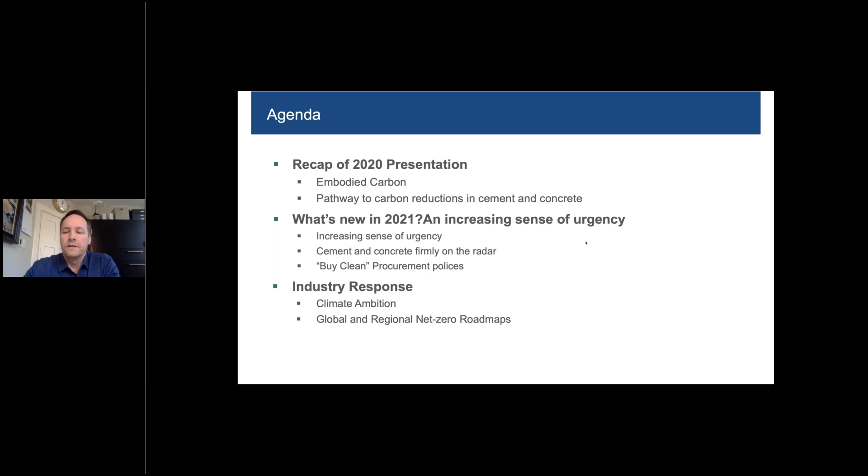So very briefly, just recapping some of the slides some of you may have seen before. A big driver for the attention on concrete—climate change has for many years been focused on industrial emissions. So the cement industry, as a large industrial emitter, has been deeply involved in conversations around carbon pricing and other policies. But that focus on emissions is now shifting in a way that is really bringing concrete into the conversation, and a lot of that is driven by this notion of embodied carbon that comes from the green building sector, which refers to all the carbon emitted from the extraction and manufacture of products. So in the case of concrete, cement is where most of the emissions come from, but ultimately concrete is the product that gets used in buildings and infrastructure.

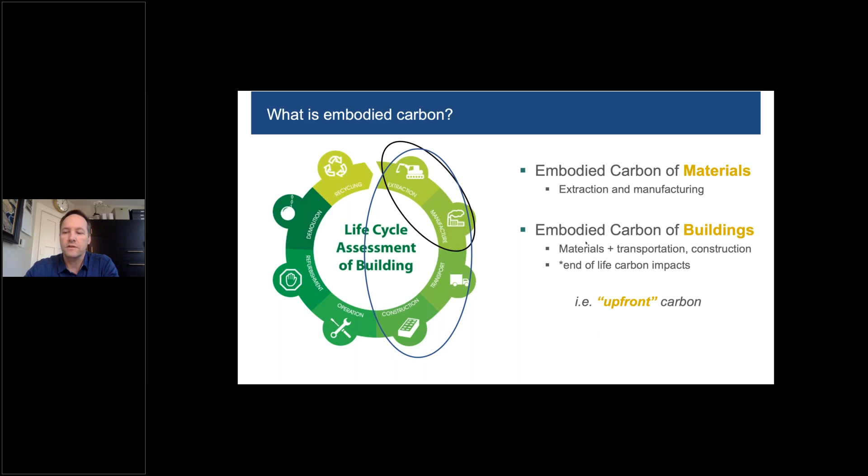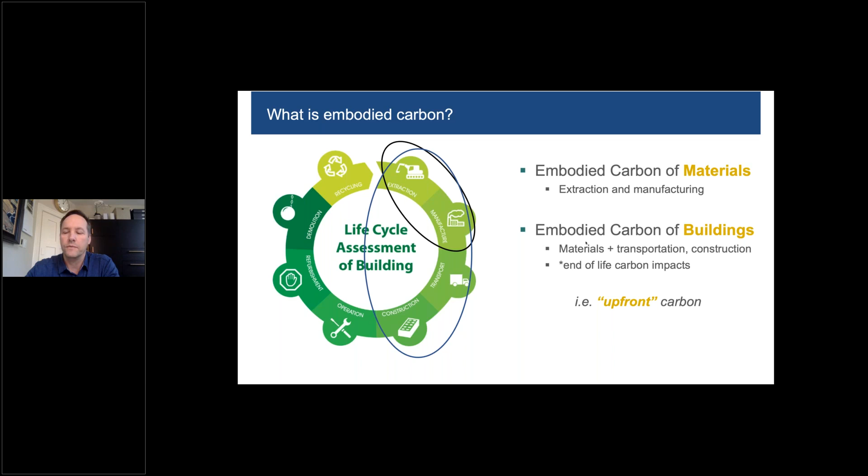And as the construction industry, architects, developers, and others start to look at reducing carbon from their projects, they're no longer just looking at, say, the energy emissions from their building. They're starting to think about the materials they're using to build those structures as well. And one of the reasons is that when you look at buildings in particular, they're about 40% of global emissions, but of those emissions, about 25% of that 40% come from the materials used in the construction process. So it's a significant chunk of the pie.

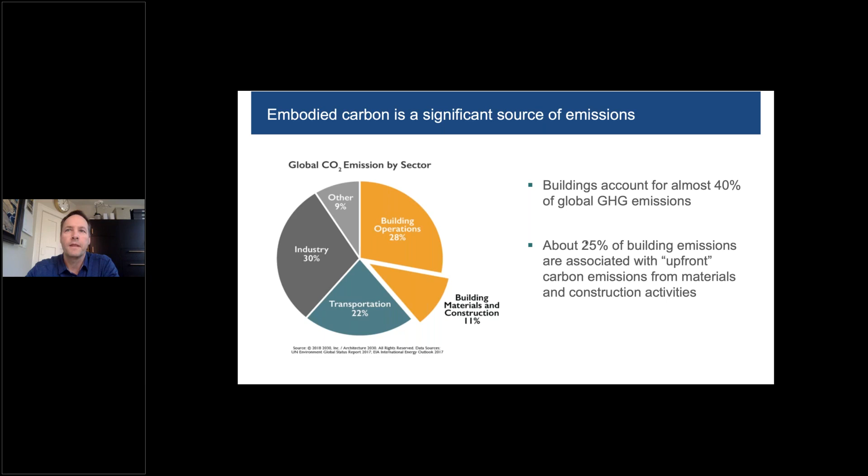And the other reason is—anticipating a bit of the conversation around urgency—there's this notion that in buildings and infrastructure, when you emit carbon to build the materials for a project, those emissions come immediately, whereas some of the operational emissions from heating and cooling your building, for example, accumulate over time. So you get more early bang for your buck by dealing with those embodied, or so-called upfront, emissions.

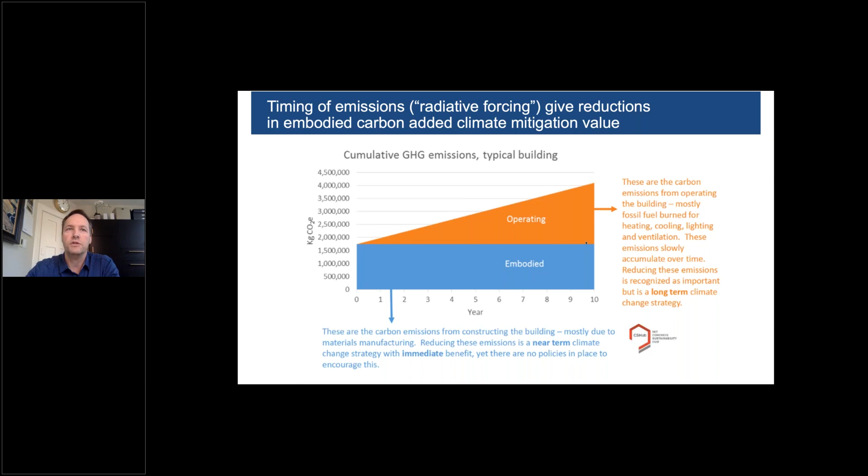Cement and concrete are obviously huge players in terms of construction materials. In fact, the most used construction material on the planet is concrete. I'm sure you're all familiar with the stat that nothing is used in greater volume on the planet than concrete, except for water. So it's not surprising that we would be on the radar screen.

But just from the industrial perspective, you can see here that when we look at industrial emissions only, cement is a significant part of that pie. About almost a third of all industrial emissions come from cement manufacturing. That translates into pretty significant numbers - up to 8% of global emissions, total human-caused emissions, come from cement manufacturing.

In Canada, it's a bit less than that. It's about 1.5%, but it's still close to 11 megatons, and so it's significant. I think people realize that you can't possibly address the climate challenge without addressing emissions from cement manufacturing.

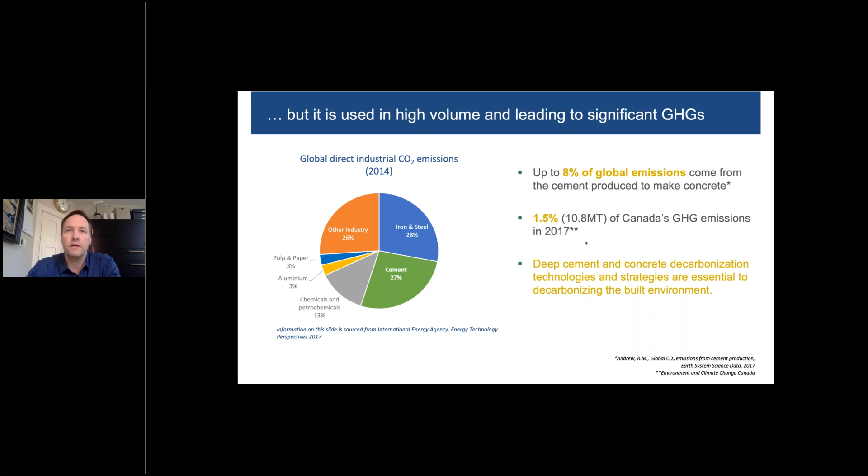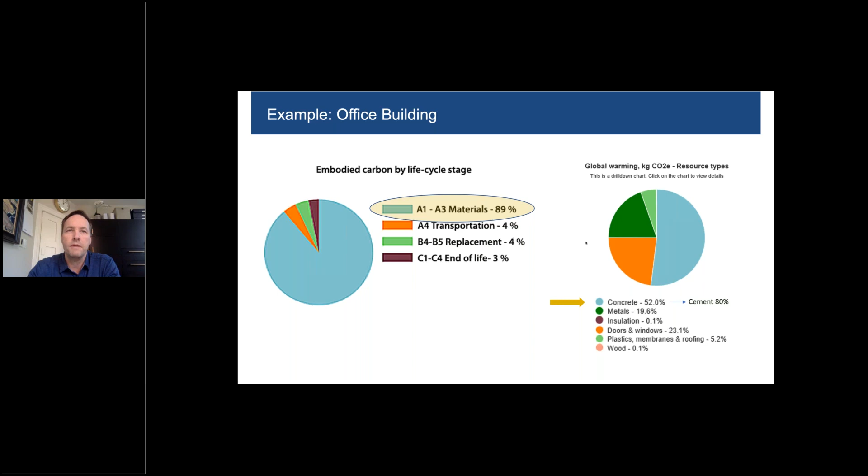But on the concrete side, you can see when we look at actual projects, materials are what drive the emissions - in this case an example of a multi-story office building - and of the materials, it's concrete, and in particular the cement in that concrete, that is the major player. So that basically explains why concrete is suddenly becoming a big focus of those concerned with climate change.

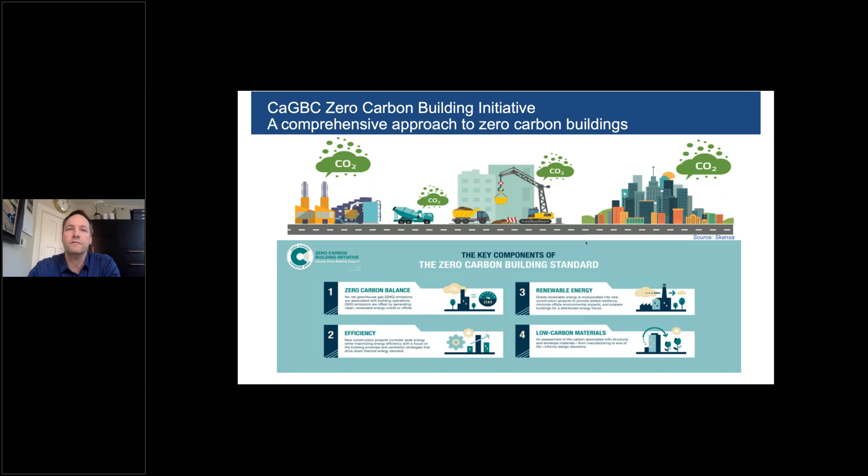Here's just an example, a Canadian example, of the Canada Green Building Council further developing the LEED programming and creating a separate carbon-focused standard called the Zero Carbon Building Initiative, and embodied carbon is very much part of that standard. So it's becoming a very normal thing, certainly in the green building community.

Up until now, we've been talking about the different things we're doing as a sector to decarbonize that final concrete product. A lot of it focused on the cement side, so improving the efficiency of the manufacture of cement, blending lower carbon cements like Portland limestone cement, using lower carbon fuels in our industrial processes. But increasingly, we've had to talk about the concrete side too.

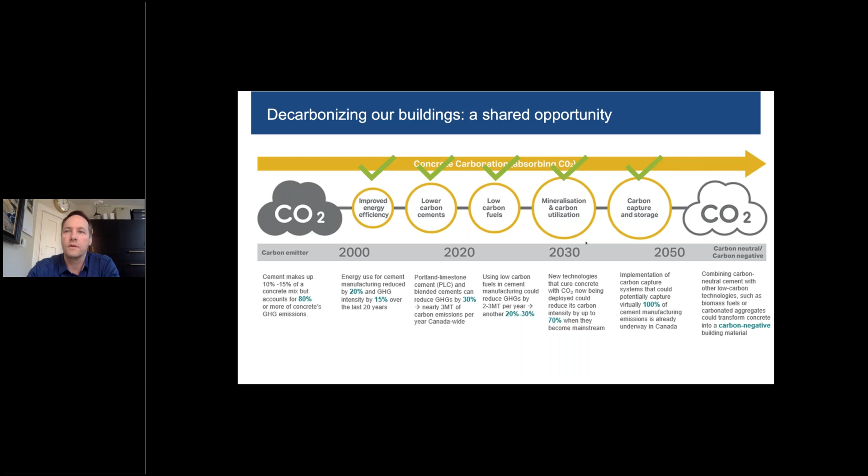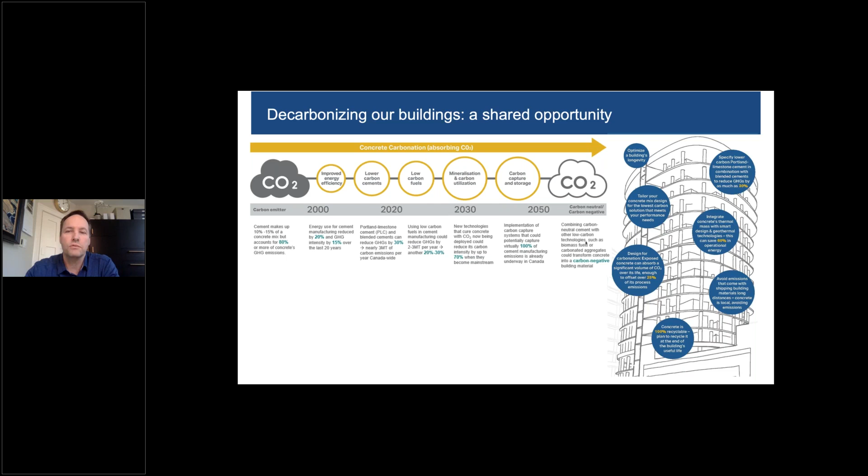So, looking at mineralization technologies that are starting to come out, about injecting CO2 or putting carbonated materials into the concrete itself. And then also talking to the design community about what role they have in making sure that they're optimizing their concrete, that they're aware of and using the low carbon solutions, that they're taking advantage of some of the design-based strategies to reduce carbon over the life cycle of their project.

2021, many of us might think of it as the year, or almost the second year, of COVID, but in many ways it was also the year of climate change. Just a couple of reminders of some of the events of this year: we had massive climate-driven catastrophes in developed nations, which I think is maybe part of what was unique about 2021. We had massive flooding in Germany - people dying, houses being washed away, massive destruction - just sort of unthinkable in the recent past in a place like Germany.

In Canada, of course, we had the heat dome and heat deaths out west, and massive fires and impacts on many communities in that province. And this all aligns with the message now that we're hearing internationally around the urgency of climate change, in particular in the lead-up to the upcoming COP26 meeting. The IPCC issued its most recent report, which was effectively branded a code red warning for humanity.

So I think the sense of urgency is palpably higher, and you can also see it reflected in recent polls of people's attitudes to climate change - there has been a dramatic upswing in support for and expectations around more aggressive climate policy. In terms of what that means for us in particular, I think good and bad.

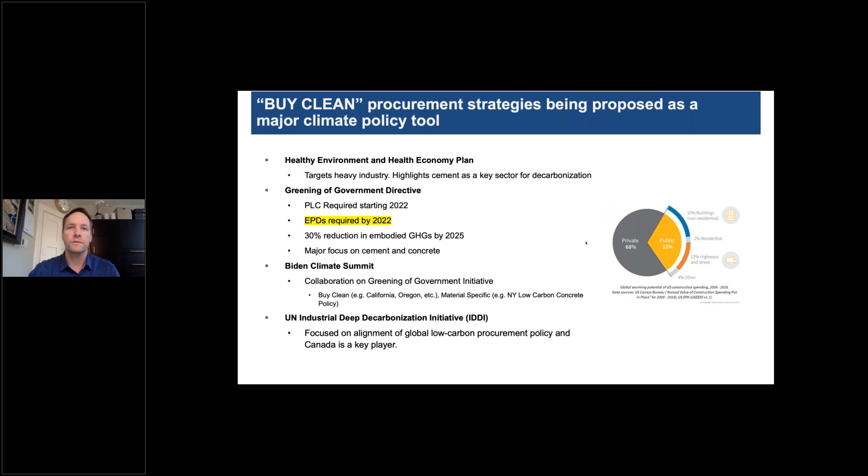We've already seen in the United States a number of state-level procurement, low carbon procurement policies that target cement and concrete, and also a conversation happening through the UN, where Canada and the US are both major players in driving that conversation. Here's just a couple of examples.

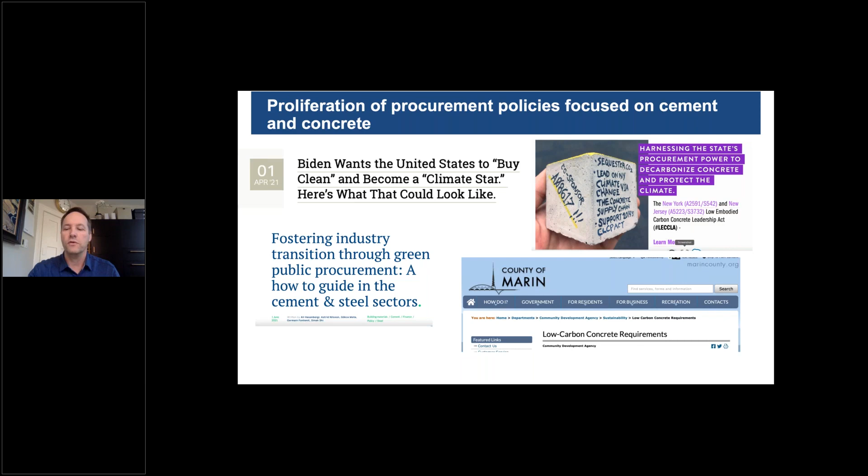I mentioned there's already some procurement policies in place. You can see that concrete is one of the major focuses. But the risk is that some of the approaches being considered are without a whole lot of collaboration with or input from our sector. You can see very prescriptive solutions, limiting cement content in concrete rather than letting concrete producers and cement manufacturers work together to provide the lowest carbon innovations available for the types of projects the concrete is being used for.

So that's one of the things we're dealing with - while certainly on a global scale I think the industry has shown a lot of leadership, proactive leadership on climate, we really need to get ahead of some of the initiatives happening kind of unilaterally outside of our sector, to make sure we're driving the types of policy and other solutions that bring us the most flexibility and the most room for innovation in this space.

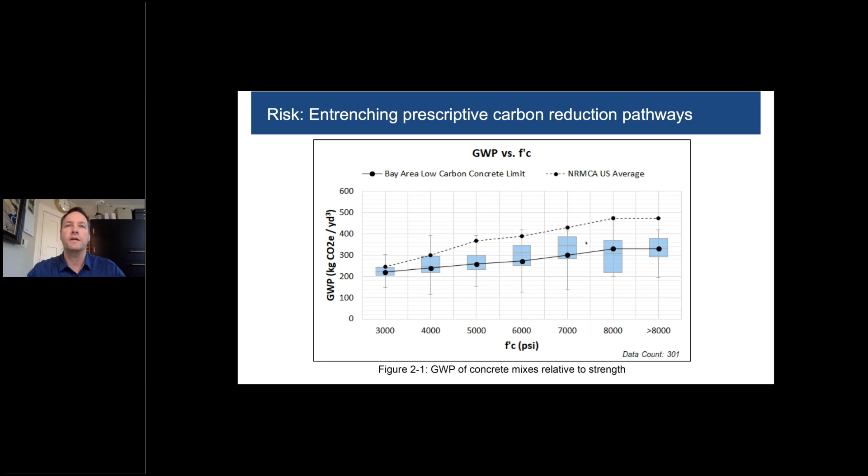So that's really, in a nutshell, the reason why the industry has started to become very proactive in making sure stakeholders understand that we take climate change seriously, that we have science-based driven ambition around reducing our carbon emissions, and that we have an actual plan to get there, and an understanding of what we need in terms of government policy and other supports in order to realize the ambition, which is ultimately the ambition to get to net zero concrete.

In the US, you may have seen that the Portland Cement Association released a roadmap earlier this month. It was part of a broader global effort led by the Global Cement and Concrete Association towards developing a global response for cement and concrete to the climate change challenge. Also earlier this month, they released their plan, called Concrete Future. It's their roadmap to achieving their climate ambition, released about 6 or 8 months ago, committing the industry to aspiring to net zero concrete by 2050.

This roadmap also articulates the level of ambition for 2030, 40, and 50 as milestones to get to that net zero space. I'm not going to go into all the different details, but just to give you a snapshot - the meat of it is, we will deliver society with net zero carbon concrete by 2050. To do that, we're going to work across the built environment value chain and think about things not just in linear terms, but in circular terms and from a life cycle perspective.

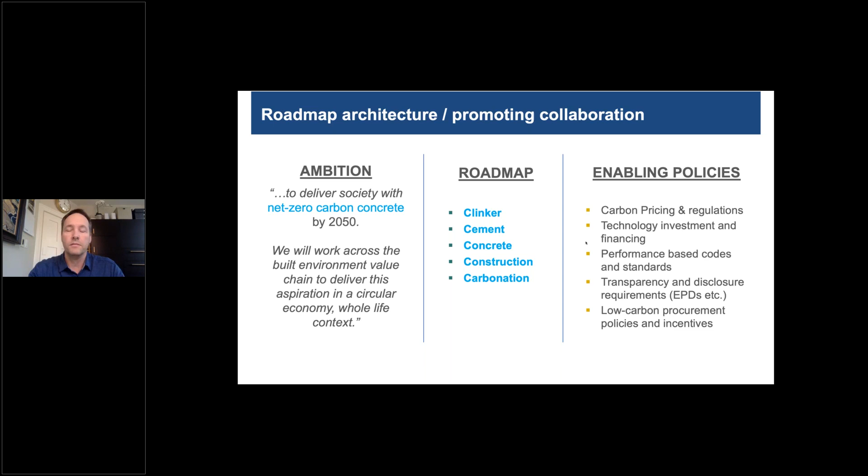So it could be attracting financing for technology investment and R&D. It could be a migration away from some of the prescriptive approaches to specifications to a more performance-based codes and standards process that invites low carbon innovation. It could be a leveler playing field around transparency and disclosure, making sure that the data used for decision making is up to date and accurate and reflective of the full life cycle benefits of cement and concrete products, and then supporting policies, including and maybe especially low carbon procurement policies at the federal, provincial, and municipal level.

So, reducing some of that concrete demand by being more efficient in its use in design and construction, efficiencies in the actual concrete production process, savings from the cement used in concrete, savings from how the clinker used to make cement is produced,

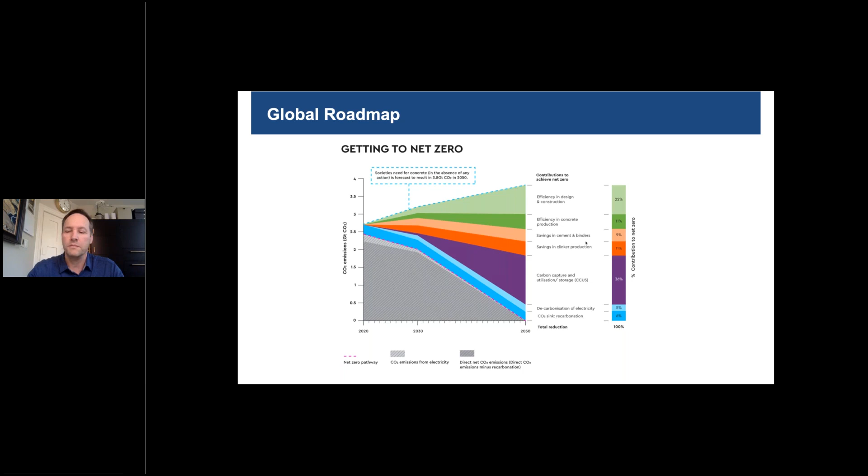decarbonization of some of our what they call scope 2 emissions, so transportation infrastructure emissions that come from infrastructure outside our sector. And then you can see that recarbonation piece is significant, but the most significant piece is carbon capture, utilization, and storage, which is a key technology to reaching net zero and more or less needed to deal with the chemical process emissions that happen in clinker production at cement facilities.

This gives you just a little bit more detail on what each of those levers actually mean. So you can see from savings from clinker production, for example, we're talking about thermal efficiency, using decarbonated raw materials in the kiln, advanced low carbon fuels like hydrogen, biomass, that sort of thing.

You can see when it comes to efficiency in concrete production, we're talking about optimizing mix design, optimizing the constituents of concrete. Because it's a global roadmap, they're also taking into account developing countries that still use a lot of bagged cement, so they're talking about industrializing some of that concrete manufacturing process in those regions.

I won't go through all of the details here, but you can see on the slide that there's a whole bunch of different factors in each of these decarbonization wedges that have been considered and ascribed a numerical value of what we think we can achieve in terms of carbon reductions using each of these different levers.

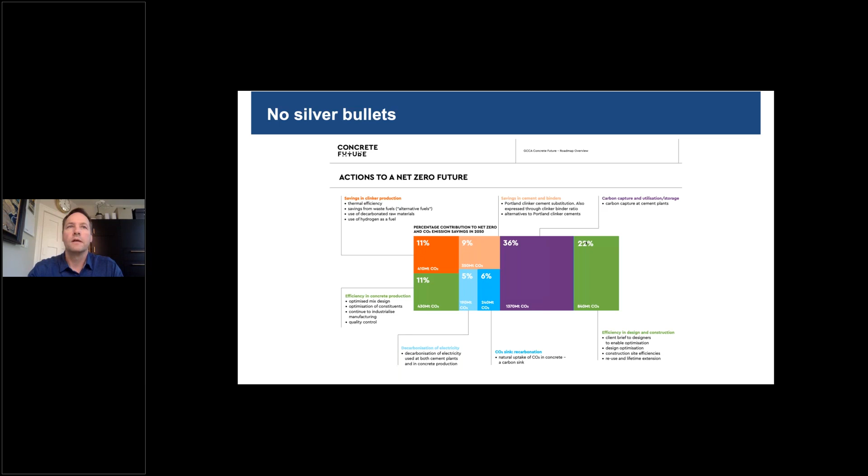Just very briefly, here in Canada, we are in the process of developing a Canada-specific roadmap that is aligned with what the GCCA has done, as well as, by extension, what the PCA has done in the US, but tailored to the Canadian policy context, which is certainly more advanced in Canada than the United States.

We already have a commitment to $170 per ton carbon price by 2030. We have the $8 billion Net Zero Accelerator Fund and a sort of ecosystem of climate policies and ambition already in place. And so part of that has been actual formal agreement with our sector.

Recently, the Cement Association of Canada launched a partnership with the Government of Canada to support the development of our roadmap, and more importantly, to start talking about the different policy, financing, codes and standards, and other levers that our government is going to have to move on if they are going to support us in realizing our ambition. This is a very significant and positive development for our sector, and the work of that partnership is unfolding in parallel to our own inwardly focused roadmap development process. So we have all the pieces in place, I think, for success here.

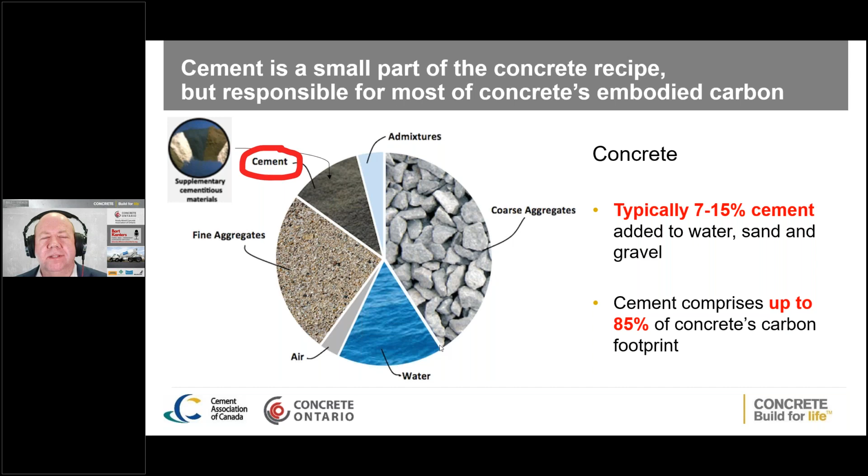Looking at the various cross sections when it comes to ready-mix concrete, we've got our standard raw materials. Cement makes up 7 to 15% of the volume of the concrete. As it sits right now, it has a fairly big carbon impact. That's obviously going to reduce over time as we move along, but that's one of the key things we have to address.

The Cement Association and the Canadian Ready Mix Concrete Association, as Adam highlighted, have been working with the federal government on different ideas when it comes to green concrete procurement. We're still waiting for final documents to be produced. But there's been lots of discussions about how can we utilize things like Portland limestone cement.

How do we set relative targets for reductions? And really what it all comes back to, as Adam highlighted, is if you're going to improve something, you have to start measuring it. You can't possibly improve it until you start measuring it.

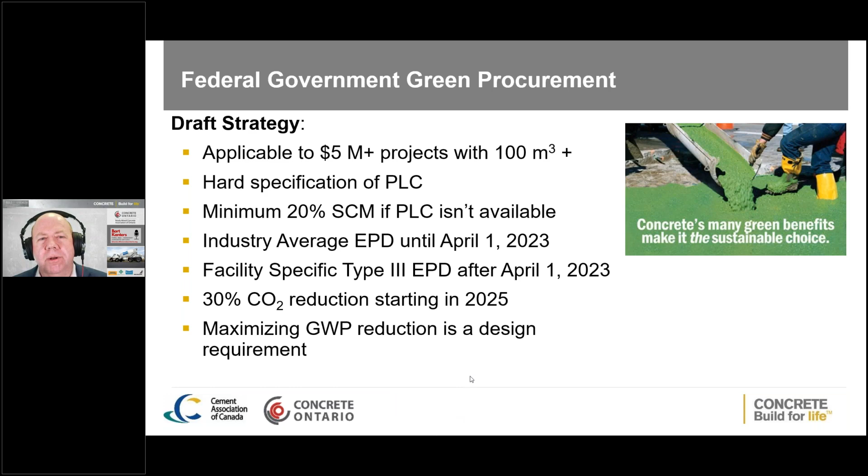So really what the cement and concrete industry has done is we've made a commitment. We're happy to be the guinea pigs and go first from the material standpoint and try to participate actively in quantification exercises to look at what our current carbon contents are and how we can optimize them, because we know we've got a lot of options out there for reductions.

So how did we do this? Back in 2016, the Canadian Ready Mix Concrete Association started off with our first industry average EPD for ready mix concrete. We went through 18 different mix designs. We basically looked at, for a sample mix design with different levels of either GU or GUL cement and varying levels of supplementary cementing materials, what is the impact that has on the carbon content of the material?

Picking an example here, this is just 25 MPa concrete pulled out of the existing document. You see the lowest carbon content is at 214 kgs per cubic meter, and the highest is at 327. So what's the worst? Not a big surprise when you use just GU cement and no supplementary cementing materials. So the first number that you see in that table gives you the highest carbon content.

If we switch over to GUL, we immediately get an 8 to 10% reduction right off the bat. And then as we move through and start using different supplementary cementing materials, you get better and better impacts. So this was our first attempt to try and address or quantify what our carbon contents were across the industry.

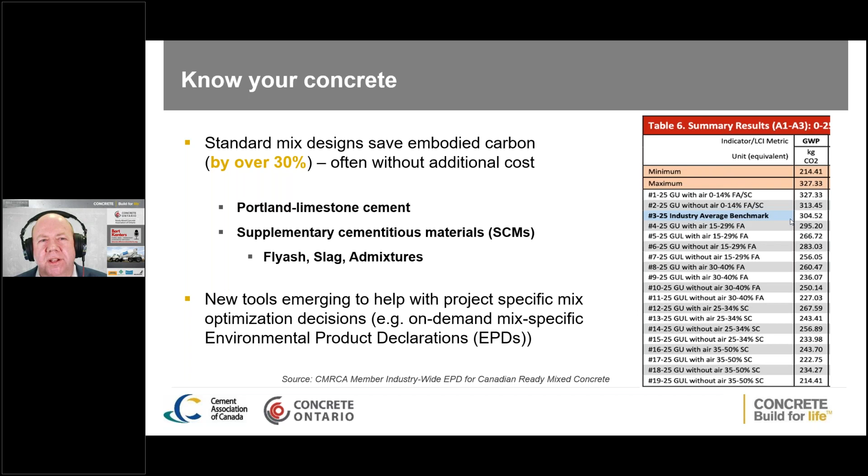We're a very technical industry, so as soon as we start doing a national average, that creates a whole bunch of technical challenges for us, because the aggregates in each province vary, the cements in each province vary, the site conditions in each province vary. So doing a national average is a little challenging. We're going to come back and talk a little bit more about that.

Trying to get down to the nuts and bolts, what can we do? A number of key factors were highlighted. We've got to look at things like the design, optimizing the design, optimizing construction methods. Construction schedule is one of the key things I'm going to come back to.

So ready mix concrete is different than every other construction material. The reason that it's the most used material in the world is it's so versatile. When you order a 2x4, it's a 2x4. The carbon content of that 2x4 is fixed. If I order a 2x6, its carbon content is fixed - slightly higher than the 2x4. Go to a 2x8, 2x12, very linear.

With ready mix concrete, we're supplying a plastic product out to the job site that can set in as little as 5 hours to as long as 3 days. And strength specifications can be as short as 24 hours for form removal, or 56 or 90 days for mass elements where thermal conditions are a consideration.

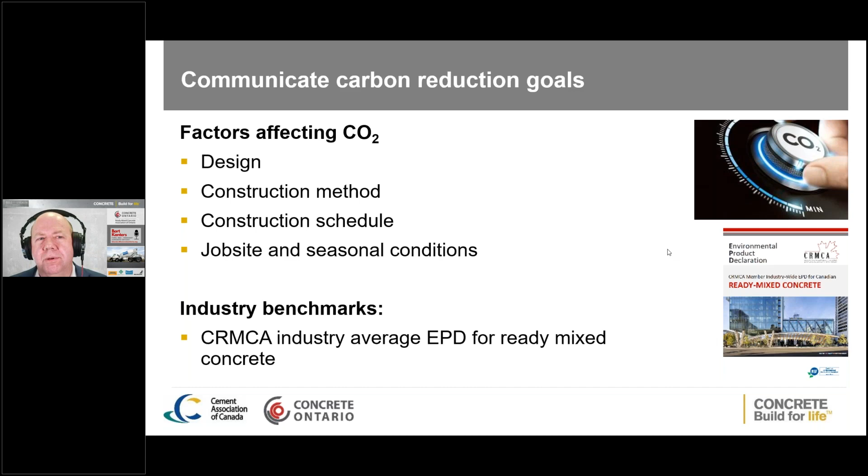So there's a huge amount of variability in our material. So when it comes to these discussions, simple tables really don't work. We have to start working first with the contractors, because they're the people directly placing the material, and secondly with the designers when it comes to how can we optimize these mixes, and what impacts some of the changes they're going to make will have.

When it comes to environmental product declarations, what we're looking at is, for ready mix concrete, what are the various factors at the concrete plant that impact the various indicators for the product category rules. We've got 6 different indicators. Global warming potential is the primary one people are focusing on, but we've got 5 others.

It's things like: how much natural gas did we use in the winter to run boilers? How much electricity did we need to run the motors at the concrete plant? How much diesel fuel did we use to run the trucks, both to mix the material and to drive out to the job site? All of those things have an impact on our carbon content.

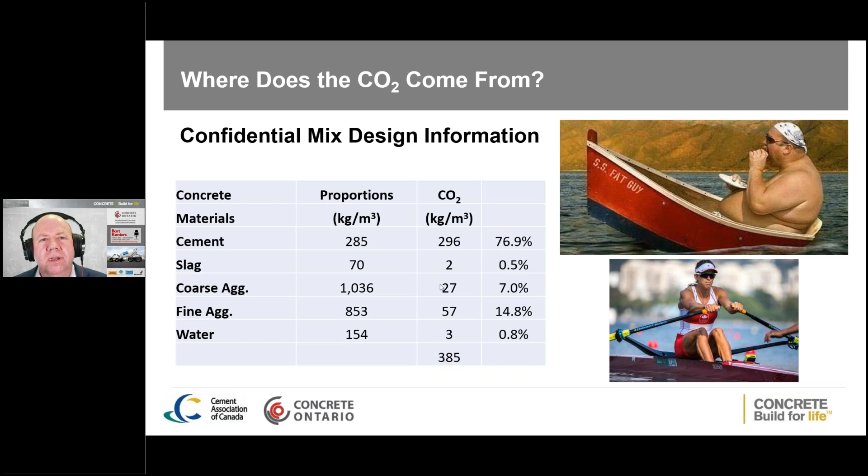Sand and stone still make up 65 to 75% of the material. They have impacts as well. You still have crushing for limestone, washing, screening, and processing at the aggregate facilities. Those all have impacts; they have to be accounted for. Even water, whether we're pumping it out of the ground at rural plants or using municipal water, it had to be treated and pumped out to the concrete facility. Those all have impacts. So these are the rough numbers we're talking about when we get into it.

So now we go back and we say, how can I reduce these impacts?

So thinking about those numbers, which you're never going to remember going forward, we look at one of the biggest impacts: cement content, GU or GUL. GUL is lower and better, but cement content is one of the big things.

One of the things we constantly see is people specify, for example, 30 MPa or 35 MPa concrete, and what does the test report show? 45 or 50, drastically over-designed. So one of the critical issues we have to address is the over-design in our mixes, just to avoid some of the challenges out on the job site.

Working positively with other associations like the Canadian Council of Independent Laboratories, we need to encourage proper and efficient testing practices on job sites. If there are challenges for testers when it comes to obtaining proper cylinder storage conditions, we need to work with them to address that.

If we're going to optimize our mix designs, and that's one of the key components Adam pointed out in his net zero roadmap, we need to reduce the over-design in concrete. That needs to be one of the primary things we look at.

Secondly, there are also opportunities for new technologies. When it comes to maturity calculations and some of the new sensors that are out there, they're not new to the construction industry. Their use is expanding significantly, but that's the kind of technology we need to go to.

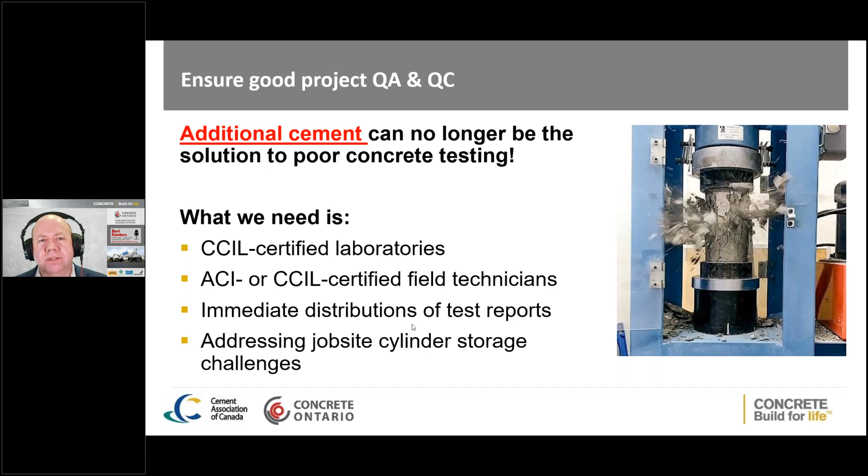Other key component: we've been talking about Portland limestone cement here in Ontario for about 10 years now. Usage is very significant now. I think we're one of the leaders in the country in use of Portland limestone cement. We won't get into the cement chemistry here, but basically we've got an elevated amount of limestone in the cement, processed at the cement plant to a finer particle size that makes it more reactive.

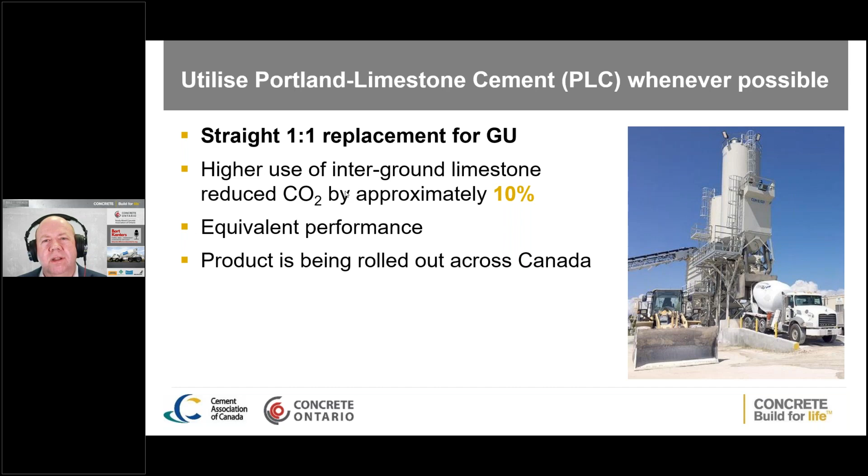We get the exact same concrete performance when it comes to strength development, air entrainment, freeze-thaw resistance, and permeability reduction with this material for a 10% carbon reduction. So for the concrete industry, it's basically a one-to-one replacement. Whatever your GU content was, you replace it with GUL and see that 8 to 10% carbon reduction right off the bat. There's a lot of opportunities there.

Supplementary cementing materials, we talked about those before when I showed the table with various impacts broken out by materials. You saw the impact of using supplementary cementing materials. We've been promoting them for 50 years. They have a lot of positive impacts when it comes to reduced permeability, increased durability, and increased compressive strength.

There are a lot of other reasons why we want to use these materials, but they also have the added benefit of being much lower intensity when it comes to carbon. So expanding their use really has a huge impact. We're seeing projects, mass concrete placements for example, getting SCM replacement levels as high as 70%, which is not unheard of. So there's going to be more opportunities there.

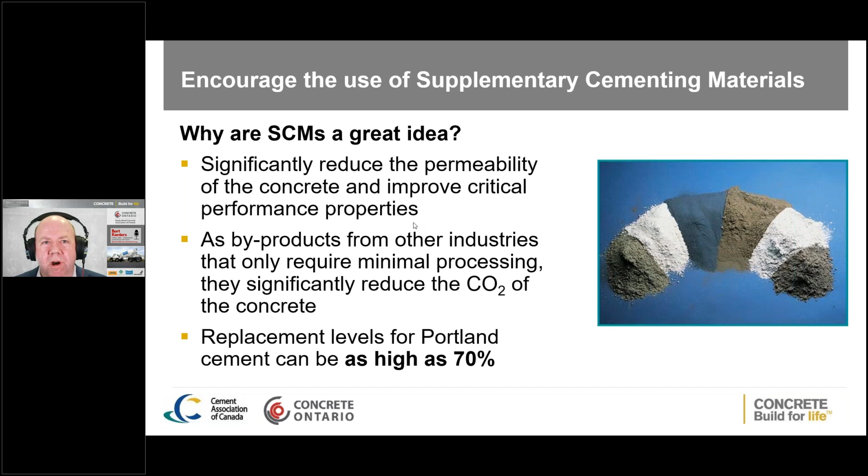Another key component, one of the raw materials I didn't show in the table when we were breaking out carbon impacts, was admixtures. Did I do that because I hate admixtures and they're not important? Absolutely not. Their carbon impact is so minuscule it doesn't even meet the reporting thresholds.

But saying that, admixtures do play a critical role in concrete mix design optimization. They have the ability to drastically change, for the positive, the performance properties of both plastic and hardened concrete. There are new materials out there that allow for cement optimization and have significant impacts on long-term durability, so there's a lot of new specialty materials we can start using on projects.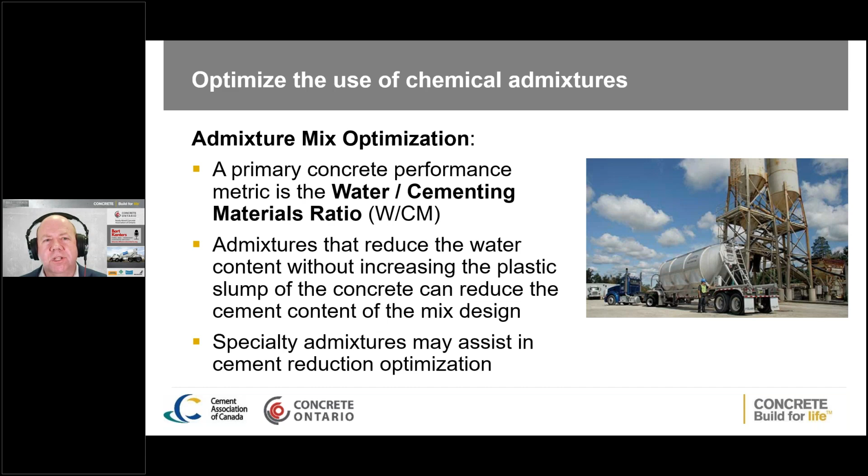We're seeing more and more expanded use there; they're going to play a big role going forward. Other critical factors: we get into some of the things we want to avoid. We don't see very many minimum cement content requirements anymore in Ontario, thank God.

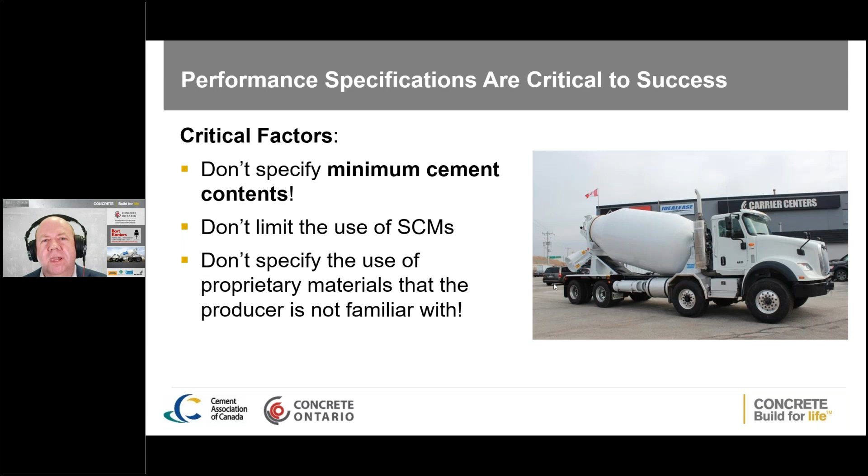But again, those are some of the challenges. We do see concerns regarding limitations of supplementary cementing materials. There are some critical raw materials that are important to our ability to reduce the carbon intensity of the final product. We want to start using materials that can still provide the historic long-term performance that concrete is associated with when it comes to strength and durability, but we don't want to be limiting the producer's ability to use these types of new and innovative materials.

So where we're at right now, we've been working in partnership with the National Research Council, both the Cement Association and the Canadian Ready Mix Concrete Association over the last couple of years. We're very pleased that we've just recently kicked off a new environmental product declaration program. So instead of doing a national average, we are breaking the ready mix industry down into the 7 provincial regions that are represented by the concrete associations that are members of CRMCA. That's going to allow us to utilize the raw material data from each province or region to come up with accurate numbers.

If we're going to start moving to a model where people are going to start evaluating concrete and its impacts when it comes to life cycle cost analysis, then we need to have accurate data, and averaging mix designs between Vancouver, which never sees snow, and Northern Ontario doesn't make a lot of sense from a technical standpoint. So we're very pleased to see the support that we're getting from the federal government when it comes to having more accurate and representative data sets.

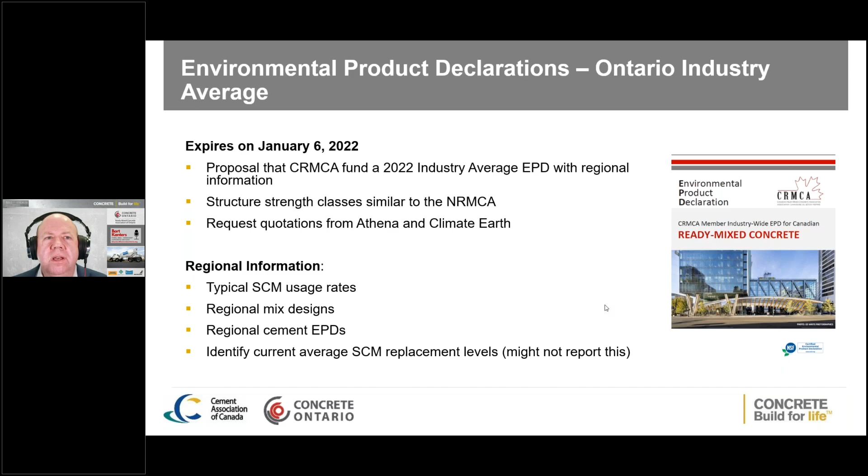So for example, what we're looking at here in Ontario, this has been updated at a recent meeting earlier this week, so I haven't updated this slide. But again, we're looking at, for Ontario, what are the basic mix designs that we used. In the last CRMCA industry average project, we started at 25 MPa. The reason for that is Western Canada has sulfates in the soil, and they can't use 15 and 20 MPa concrete for footings and foundation walls. But Ontario, we don't have that issue. We use a significant amount of 15 and 20 MPa in the residential and low-rise construction sector. So for Ontario, we're going to have 15 and 20 MPa options.

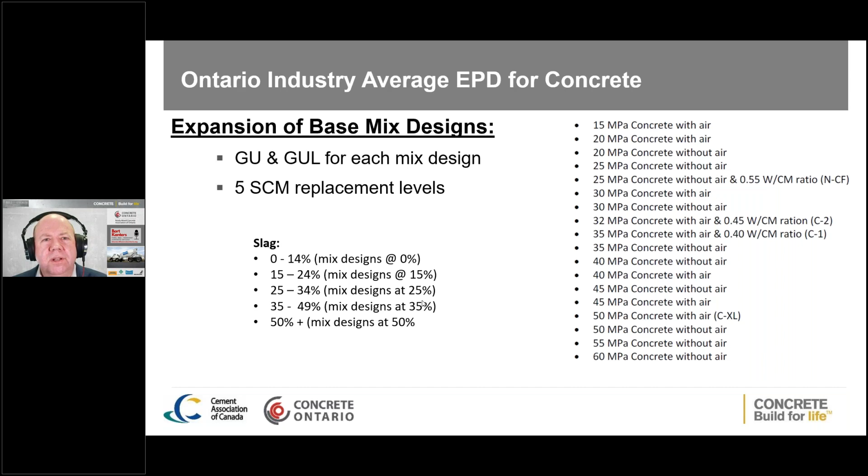We're also looking at some specialty options like SCC and other things, but we'll come back to that. In the previous edition of this document as well, we had to combine different supplementary cementing materials, but they're not all available in every region. In Ontario, slag is the primary supplementary cementing material that we use. So we're just going to look at generating tables that relate to slag and not fly ash. So different options that we're able to provide there.

So really what we're looking at is how can we significantly improve the data sets that we're supplying out to industry, and I think we're going to see that. So Q2 of 2022, we're going to have that data available. We're currently in the collection process across the country when it comes to ready-mix plants. There's over 1,000 ready-mix plants in the entire country, so we're taking basically 30% of those and conducting surveys of what's the total amount of natural gas, what's the total amount of electricity, what's the total amount of diesel fuel that you used. We're going off the baseline of full year data, so it's going to be 2020 data that we're using at the concrete plant level. And then we're going to create updated tables.

The other thing that we're going to do is try to address some of the concerns that we're getting from both architects and engineers when it comes to, if we want to talk hypothetically about possible reductions that we can implement, how do we address that? Here in the Ontario marketplace, we do have some concrete producers that have facility-specific EPDs that are available for use. We'll see more as we go forward here. But really what we're looking at with this association-sponsored project is we want to at least have the ability for producers in Ontario to calculate their basic carbon impacts of the mix designs that they're typically using. Then you can sit down with both the contractor and the owner and talk about where are the applications that we can try and optimize these mix designs for carbon.

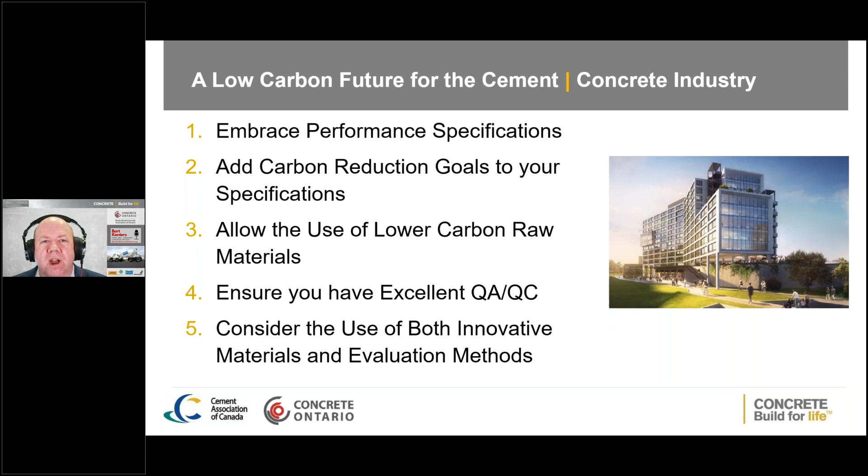The last one, probably one of the big picture challenges we have, is how can we adopt and start to utilize both new and innovative materials and evaluation methods. There's going to be a huge focus on carbon reduction in the next 5 to 15 years, and new and innovative materials are coming out. One of our existing challenges comes back to codes and standards—when it takes 15 years to move a new product through the code cycle, that's one of the big challenges we're going to have to address as an industry if we're going to try and get ahead of the demands for carbon reduction we're seeing out there.

So that said, that brings me to the end of my presentation. Now I have to look—I was pretty close to 25 minutes as well, Adam. So take that, as the saying goes.

So with that said, I'll welcome Adam back, and we're happy to address any questions that people might have.